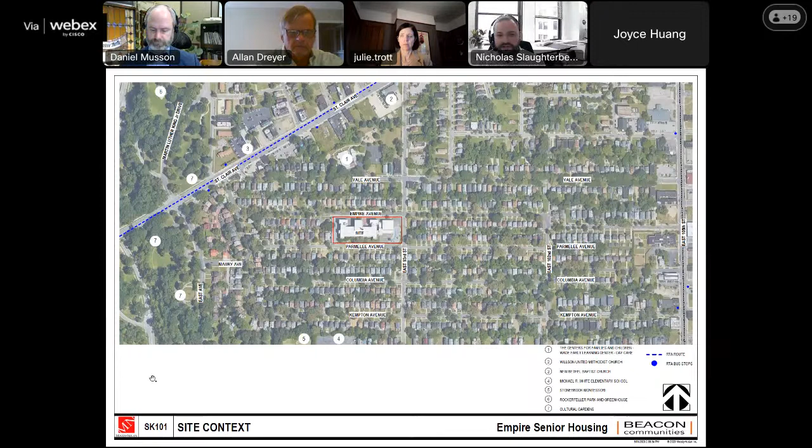It is located between Empire Avenue and Parmelee Avenue off of East 93rd Street, south of St. Clair Avenue. The St. Clair bus line and bus stops are noted on the visible plan currently being shown.

Our proposal for this project is to eliminate the 1950s gym addition completely and restore the old girls' entrance that has been hidden by that gym. The existing gymnasium does not match the architecture of the remainder of the school.

Here you can see the contextual imagery of the surrounding housing. North on Empire is residential, single-family residential, and same on the south on Parmelee. The school truly is a neighborhood school tucked in between several residences and residential streets.

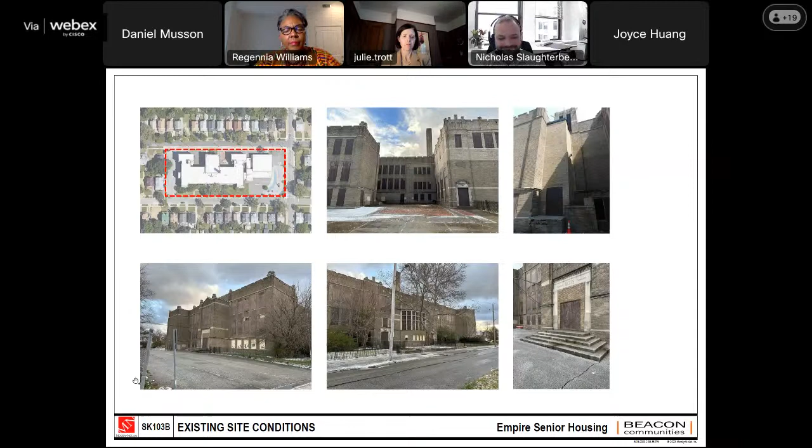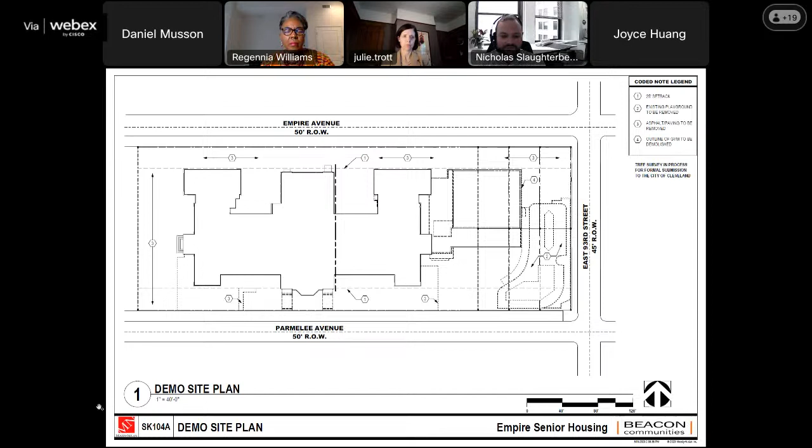The first floor of the building sits about 4 feet below grade. As such, we also need, as you can see, the northeastern courtyard has become a service courtyard. Currently, below that courtyard is a coal storage and boiler room, which will be infilled.

It is not in very good condition currently, so we are planning on adding a service ramp, a generator, and transformer in that courtyard.

As we move to the opposite end of the auditorium space, the northwestern courtyard will become a resident patio, which we'll see more information on in the next slide.

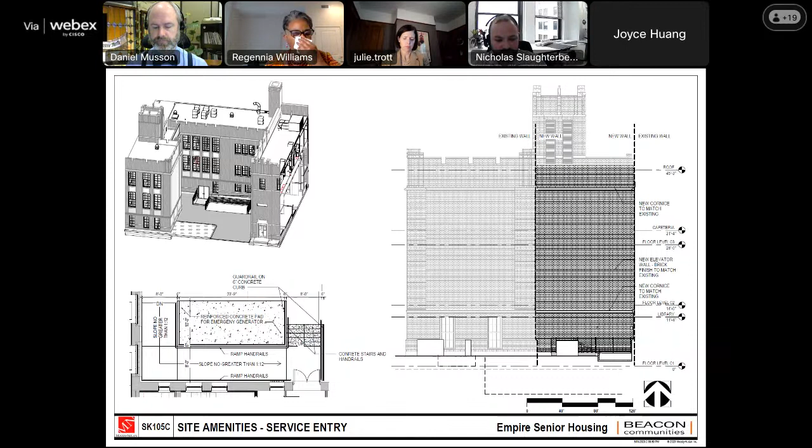Here we see the service courtyard highlighting the new wall that we are planning on building to match the existing as best as possible. We're trying to carry over the architectural features from that wall with this new one, and this is for the new elevator shafts. We're also planning on creating the service slope up for the trash pickup.

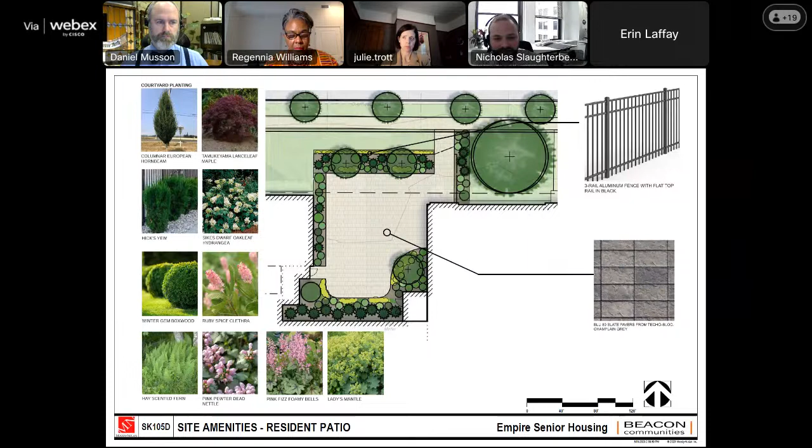Hello, this is Erin Laffay from Daru. The planting, we will have a strong evergreen planting around the perimeter of the site, and then low maintenance perennials and a couple trees. Everything is low maintenance. It doesn't need to be shaped regularly, and nothing that is invasive.

These are more of the trees that Erin was just talking about, and some more of the site planting.

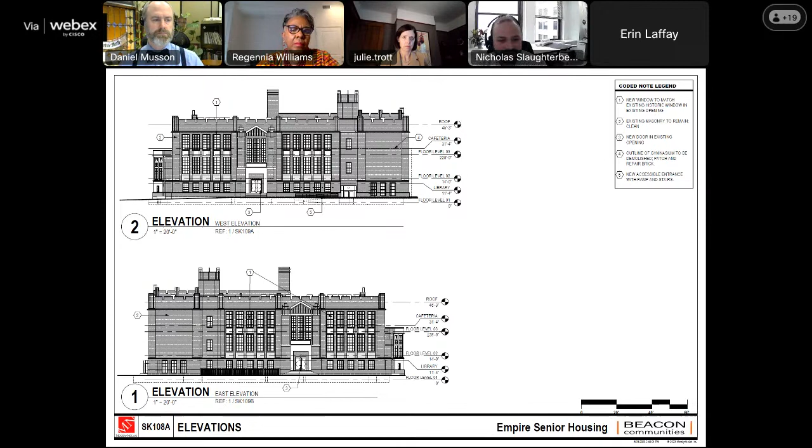These next couple slides are, again, just more imagery of what the proposal is, restoring these windows back to their original look as best as possible.

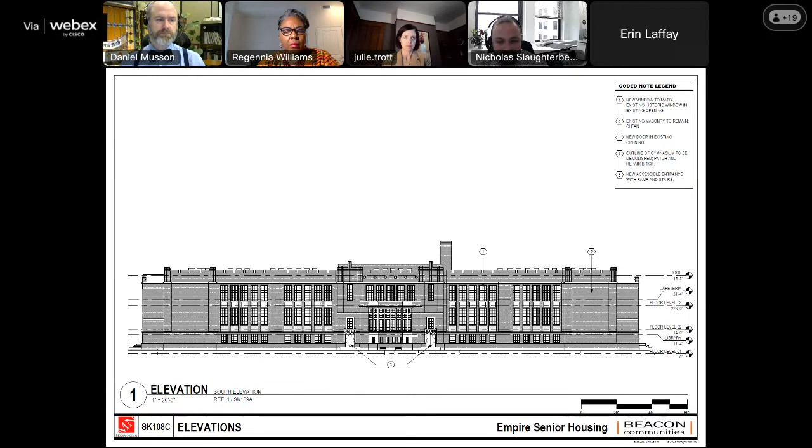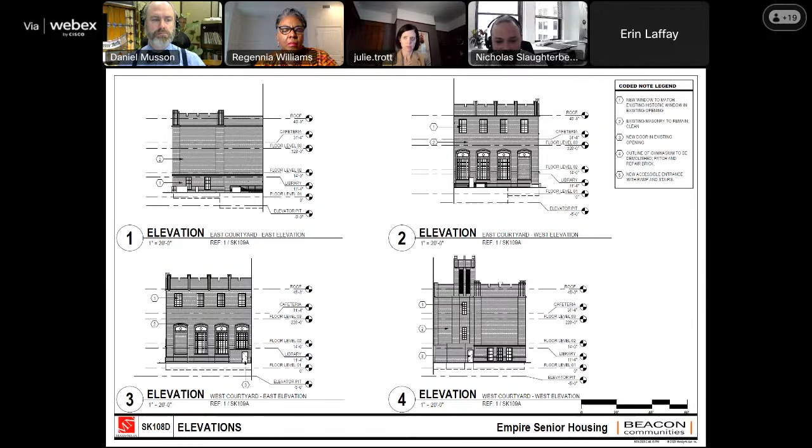When we move into the plans, the interior of the building has 65 units throughout. The first floor plays host to deliveries, the main office, as well as several one-bedroom units on the first floor, 16 to be exact. The main auditorium space is going to be retrofitted into a community fitness room, an area for light aerobic activity for the residents to maintain health and wellness.

The lower portion below is planned on being maintenance and the central plant and electric utility room. Next slide.

As we move up in the building, the original intent is to repurpose the library as units, and all of the classrooms are being refitted to be new single bedroom units. Next slide, please.

And finally, as we reach the third floor, the existing cafeteria space is going to be retrofitted additionally with about 5 or 6 different units, one of which being a studio unit. One of the challenges of this project, as we were trying to fit units into classrooms, was also making sure that we had the proper lighting and proper scale of the units.

Trash chutes will go down to the first floor and empty out through that service courtyard. The intention for all 3 floors was to keep the hallway, the east and west stairs, the boys and girls stairs, and the auditorium as areas of historic preservation.

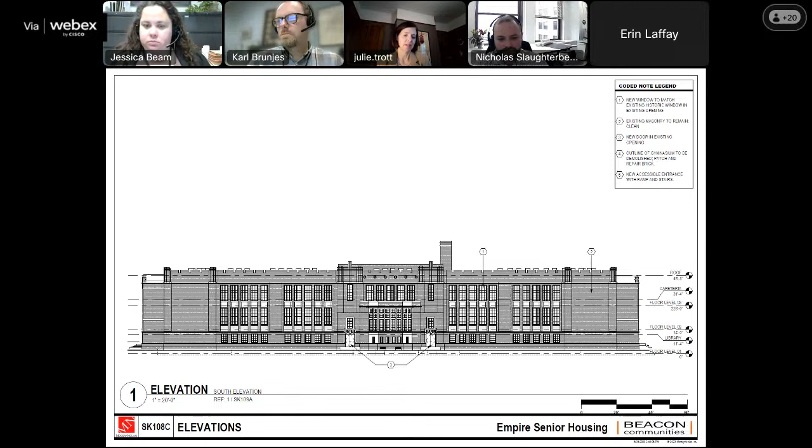I will begin. I think this is a very sensitive project. I do also support the demolition of the gym, and I feel the landscaping is aligned with the use of the building and does not take away from the building itself. So I am supportive of new landscaping and lighting also. Ms. Anderson?

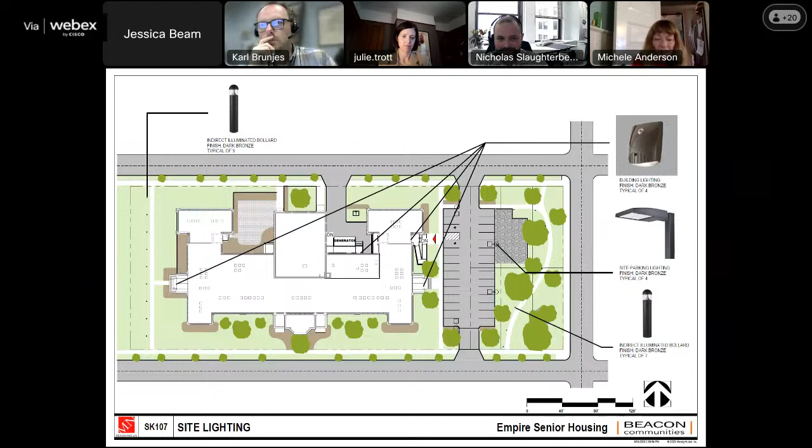Thank you, Madam Chair. Just a question about the windows. If we go to the exterior rendering, that color rendering, that one. In this drawing, it shows the windows on some of the first floor or second floor units have probably what were the original configuration, and then on the top floor there's a different configuration that looks a little more modern. I was just wondering if the windows are going to be consistent, or if they're going to maintain the windows as they are now. That's my question.

The intention of the window renovation is to replace all of the windows with new to match the existing—sorry, let me rephrase that, because existing could be either or. The original windows you're seeing, which have the muntins, the 9-panel windows, double hung, those will be the windows that we're trying our best to replace and emulate. Those 3-panel windows will be removed and replaced with the 9 panels.

Yeah, I think that would be preferable. I'm very supportive of this project. It's wonderful that this lovely building is being repurposed, and I'm very supportive also of removing the gym. This is something that's been a long time coming. So thank you.

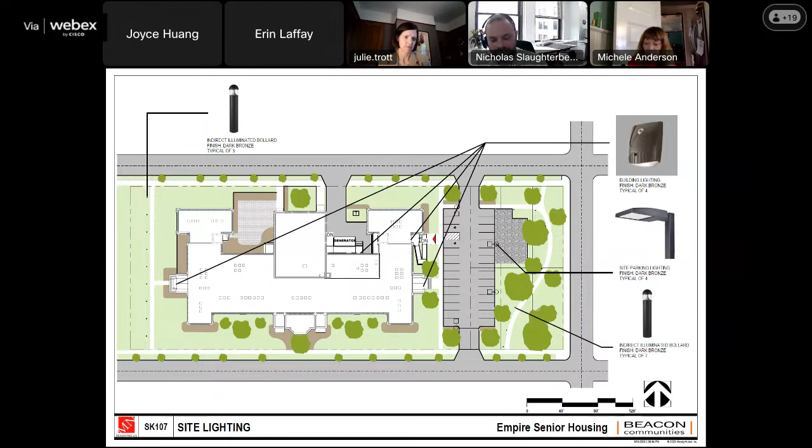Great, thank you. Madam Chair, I have another question, and can everyone hear me better now? Okay, excellent. My question is about the bike rack fixture. I see that you have a S-shaped bike rack selected, and I wanted to comment that I do think we want to make sure those bike racks are able to fit e-bikes, as more and more people are using different sized e-bikes, especially the larger ones. So I wanted to make a comment to select one that might work for all types of bike sizes. Thank you.

That is definitely something we will look into to confirm that they will work for all bikes. Overall, my last comment is I'm really happy to see this move forward. I want to commend our asset redevelopment strategists over in community development, as well as landmark staff who are continuing to help this project proceed. Thanks.

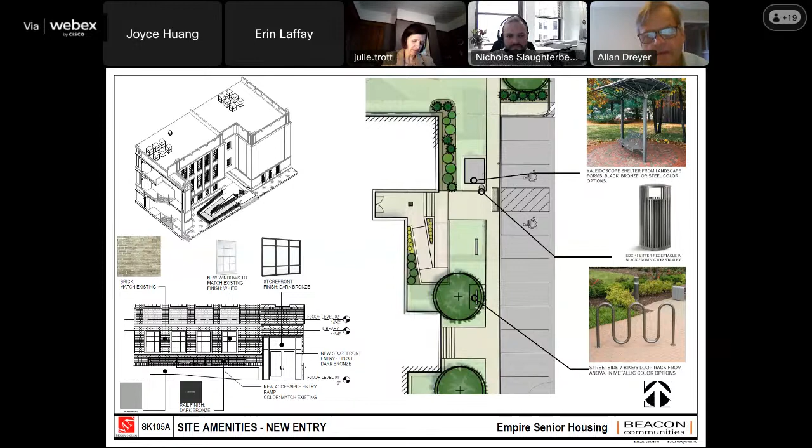Thank you, Director Huang. Mr. Dreyer? Yeah, this is obviously a great project, and I wish we had more of them coming down like this. I'm going to make the most minor comment that I could figure out how to make, but it sticks out to me. When you redo the girls' entrance, if you could make sure that the stairs match the stairs on the boys' entrance. The drawing has them looking different. The ones at the boys' entrance are very, very nice, and I don't know what you call them, but they're kind of like the, I don't know. But anyway, that's my comment.

Yeah, I think this is just a drawing error. The intent is for them both to match. All right, excellent. Thank you, Mr. Dreyer.

Ms. Williams? Madam Chair, I think this is a wonderful project. I want to start by saying that. Just had a quick comment, maybe question, because I heard our presenter say that the building had deteriorated significantly, and you've not been able to see all of the interior of the complex because of that deterioration. I guess I'm wondering, what if the deterioration is so great that it would prevent the forward movement of the plan that you've outlined today? Do you have any idea what kinds of challenges await you once you're able to see the entire interior of the school?

We plan on beginning remediation efforts here in the coming months. The current issue, there are some areas with wood flooring that are in rough shape. The floors appear to be concrete deck, and the roof, and structurally it seems rather sound in there. The big issue going in is not so much the structural soundness, it is the presence of asbestos, black mold. Just about every fungus under the sun is in there. Believe me when I say photos inside look like a horror movie. It is truly terrifying. So we're not anticipating any major structural issues so much as we are health hazards that we're planning on remediating.

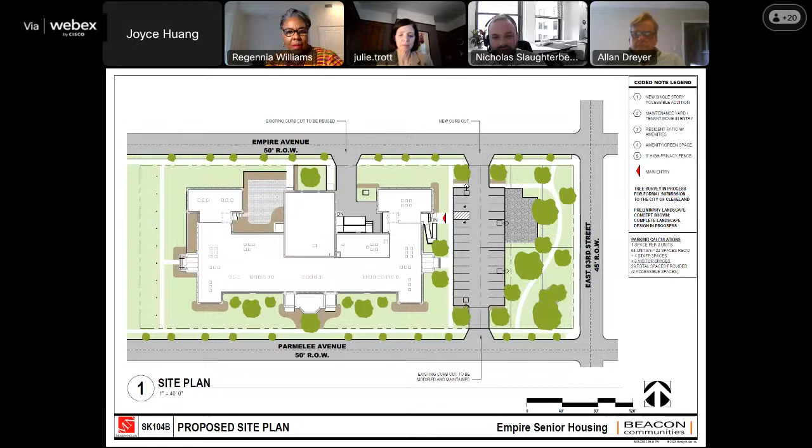Anything else, Ms. Williams? No, that's it. Thank you very much. Excellent.

Mr. Musson: Madam Chair, I just wanted to point out that this project will require two motions. Case 23-22 is for the demolition of the gymnasium, and case 23-23 is for the actual renovation and redevelopment of the property. So when someone makes a motion, we'll need two separate ones. Thank you for that reminder.

Not seeing any additional questions or comments, would someone like to make a motion on the demolition? Mr. Dreyer? Mr. Dreyer, if you're talking, I believe you might be muted. That's right, I am muted. I make the motion to approve the demolition of the gym.

Excellent. We have a motion on the table. Do we have a second? I'll second that. Thank you, Ms. Anderson. Any further discussion?

Not seeing any. Mr. Musson, please call roll. Ms. Anderson, Yes. Mr. Dreyer, Yes. Director Huang, Yes. Dr. Williams, Yes. and Ms. Trott, Yes. Madam Chair, the motion passes unanimously.

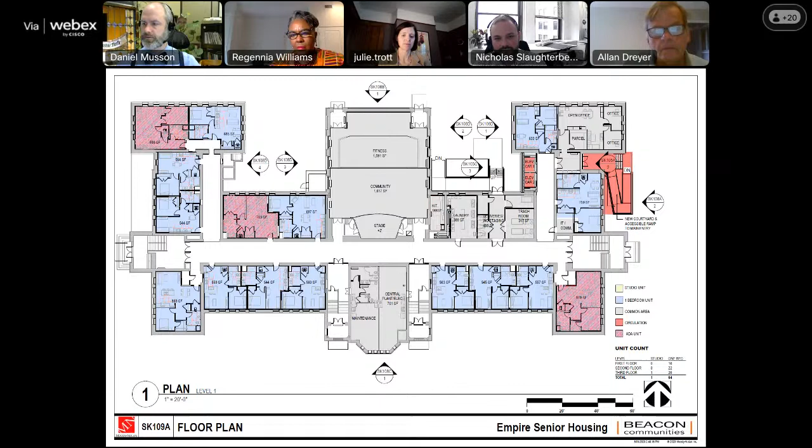Would you consider adding the two recommendations to confirm that the bike rack works with all sizes of bikes, inclusive of e-bikes, and confirming that the two stairs will match on both sides? Yes, I do. Yes. All right, thank you.

So we have a motion. Do we have a second? I will second, Director Huang. Thank you for the second, Director Huang.

Any further discussion? Mr. Dreyer? Do we want to, I may have missed this, but do we want to add a condition that they come back for the windows?

We could, or at least require them to go to staff. So submit the final window details to staff? Right. Ms. Anderson, Director Huang, are you good with that addition? Yes. All right, thank you, Mr. Dreyer. So we'll add that as a condition to submit the final window details to staff for review.

Any further discussion? All right, Mr. Musson, please call roll and announce the results. Ms. Anderson, Yes. Mr. Dreyer, Yes. Director Huang, Yes. Dr. Williams, Yes. and Ms. Trott, Yes. Madam Chair, the motion passes unanimously.

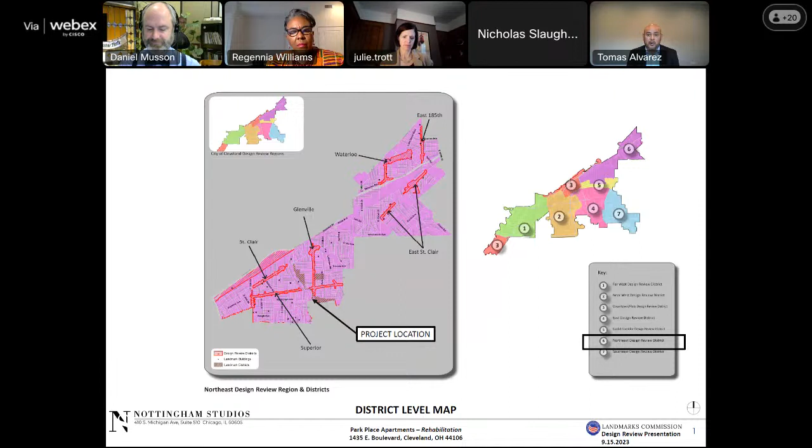Wonderful. This project, first of all, I would like to begin by giving a short description of the development team. The development team is located in California, it's the Transcend Group. They've done a lot of projects in the state of Ohio as the Transcend Group, and previously called Preservation Partners. So not only Nottingham Studios, the architect, but the Transcend Group are quite familiar with the requirements from QAP through local requirements.

But one of the things that we always like to make clear when we give presentations is that the Transcend Group's model revolves around purchasing distressed properties and improving primarily the interior of the units in order to improve the lifestyle of the tenants. So I bring this up because I wanted to make sure that the committee is aware that the focus of the design team and the development team is to improve the interiors primarily. That being said, I think we can jump into this. Can we please go to the next slide?

Park Place Apartments was built in 1965, designed by Robert P. Madison, a native of Cleveland. It's located at the intersection of Wade Park Avenue and East Boulevard. It is a total of 126 units, the design is brutalist architecture, and it revolves around building number 1. If you look at the center of this plan, this map, building number 1 is a serpentine design. It's this wavy, very, very interesting, and I'm sure quite difficult to build building.

Buildings 2, 3, and 4 are rather similar. 3 and 4 are 1 and 2 bedroom apartments. Building 2, all the way to the right, are 2 and 3 bedroom townhomes. Next slide, please.

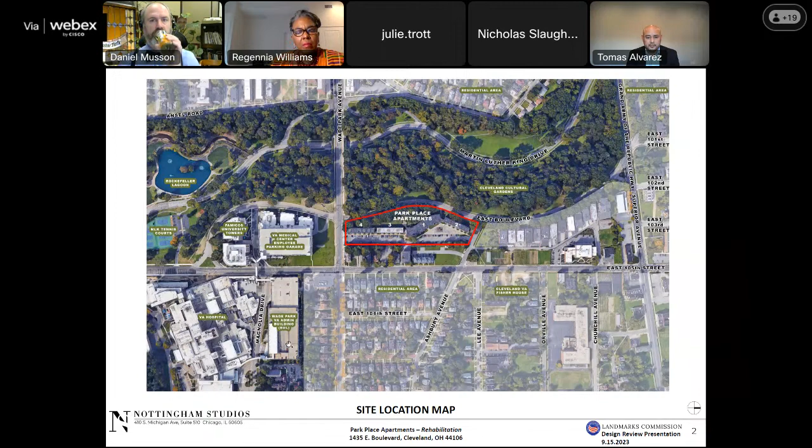That is one of the comments we have from the design committee. They suggested it would be beneficial for the overall improvement of the project to remove this fence, in order to jumpstart the use of that side. The cultural gardens are such a beautiful part that the tenants should, in theory, have access to. So that fence is really not doing much for security.

After speaking with the development team and sharing the concerns and suggestions from the design committee, it has been added to the scope of work to remove the fence and also to provide more seating areas and gathering areas on the west side of the project facing the gardens.

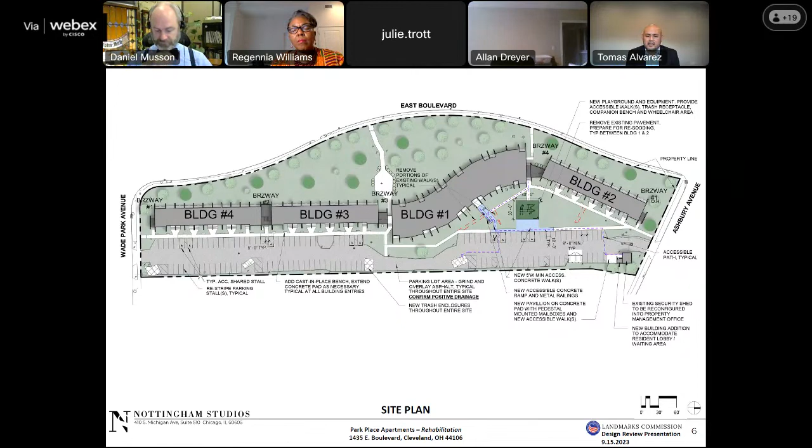Building number 1, the primary entry, is shown in the bottom left plan, an enlarged plan. The ramp will provide access to the main level, and from there, there will be an inclined lift for wheelchairs, allowing tenants to access any floor within the building. The units are distributed throughout, and we are enlarging the vestibule to comply with accessibility requirements.

All the doors will be on actuators. The management office, shown in the top right enlarged plan, is being relocated from the left plan's laundry room, which is where the management office currently is.

We want to provide easier access to all the tenants from all 4 buildings, so we are relocating the office to an existing security building on the north side of the site. We're also moving the mail room to an exterior, covered mail area, and the management office will be improved in all aspects.

The playground equipment will be new, along with the playground surface, sitting area, and bench, and access to it will be accessible. Next slide, please.

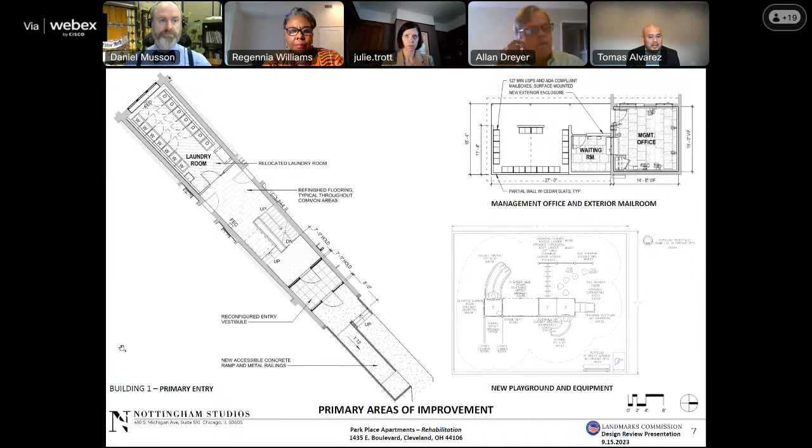There are a significant amount of existing trees that will all be protected during construction. In addition, supplemental shrubs and trees will be added.

This landscape plan is good to show because the east side, which is the top of your screen, is the area that the design committee suggested be activated for the tenant. So again, the fence along East Boulevard will be removed, providing access to the park and to the gardens, and new benches will be provided at that large sitting area where the existing shrubs note is pointing to.

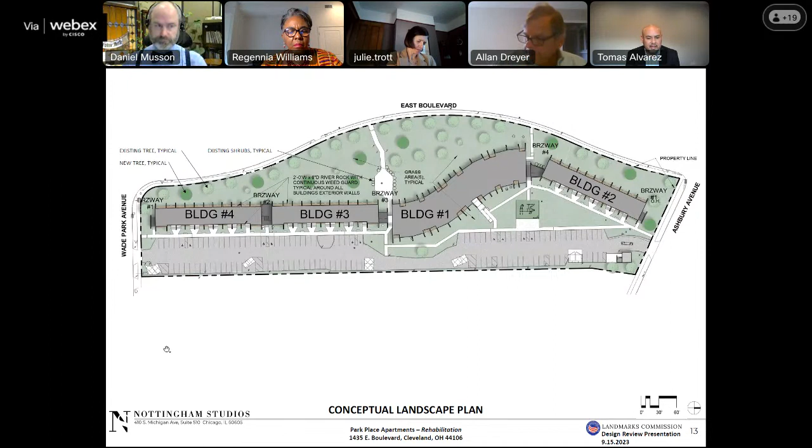Next slide, please. One of the primary focuses for this project was energy conservation.

And I know that this perhaps is not the right place to discuss it, but the plumbing fixtures for every unit are higher performance than WaterSense or any other typical requirements in affordable housing.

The plumbing fixtures will be high performance. All of the mechanical equipment has recently been replaced for high efficiency equipment. And the focus here is going to be the windows.

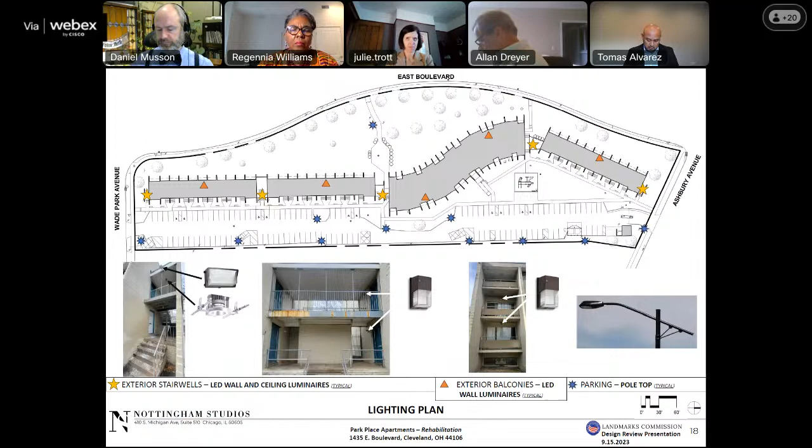I believe that is all that I have. If you don't mind, give me a second to check my notes and make sure I didn't miss anything important. I think I covered everything, but I wanted to reiterate that it's very important for our team and the development team to emphasize that our focus is on the interior of the units. Some of these units are not in living condition, and that is why the bulk of the budget is going to the units. So that is all I have.

I'm ready for questions. Excellent, thank you for the presentation.

Excellent, thank you for that summary. Landmark staff review comments? Thank you, Madam Chair. In reviewing the information submitted by the applicant, Landmark staff is generally supportive of this project, and we're happy to see some investment in these buildings. While they may be outside of the historic district's architectural period of significance, they are certainly significant, as Mr. Alvarez stated. The building was designed by Robert P. Madison, a prominent local architect who just turned 100 a few months ago.

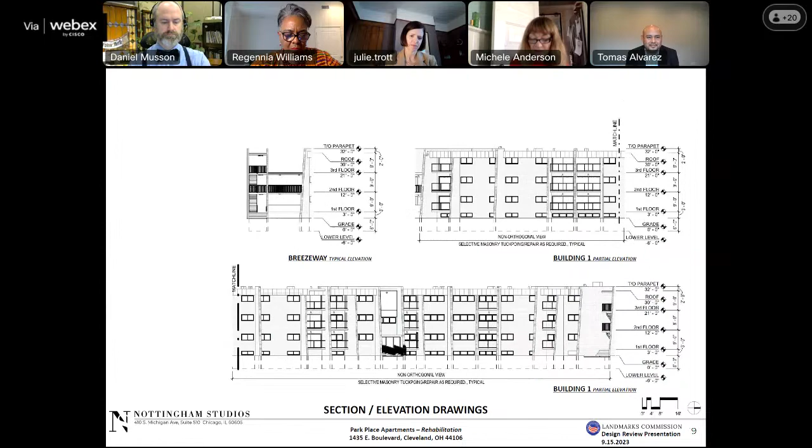Okay, Ms. Anderson, I believe you said you had 2 questions. Yes, that's my first question. The second question is regarding the fence—it appears to be a wrought iron fence that predates the building, maybe, it just looks like an older style fence. I was wondering if part of the reason it was there is so that it keeps the property from being like a pedestrian shortcut cut through. I was just wondering if that was analyzed as part of the ramifications of removing the fence. So yeah, those are my 2 questions.

Sure thing, I have to say they're both tough questions. Let me take a stab at this. Let's start with the windows. You are correct, 100% correct, and it is a fair concern when it comes to dark windows, whether it's dark bronze or dark vinyl or black vinyl windows. Vinyl windows did used to warp simply because the technology wasn't there. However, that is no longer an issue, and I can say that with certainty. These windows are insulated, the insulated glass panels, and the frame itself is thermally broken.

There's weeps, therefore the heat that enters the frame of the window is able to escape, so there's always airflow going through the frame of the window. That limits the amount of heat that's trapped and warps the window, so that is no longer a concern. I think I can confidently say that most designers would not specify dark windows if that was still the case. But one of the comments given to us earlier is that the committee would like to see some cut sheets for the windows, some product data. So we're more than happy to provide those.

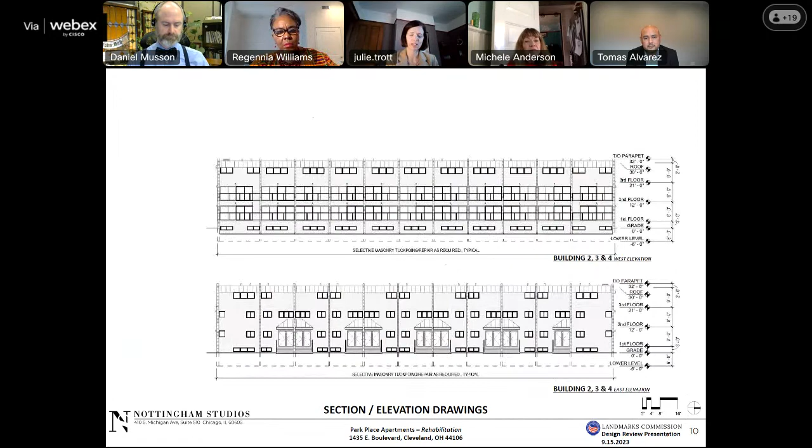Vinyl windows' life expectancy is 20 to 40 years, and of darker colors that is closer to 20 than 40. Have you explored a composite fiberglass window for here? We did, and we do have an allowance in the budget to upgrade the windows, so it does remain an option. My personal preference would go to fiberglass because of the durability and life expectancy. You're making a significant investment in this building, and we want it to be worth your while for a long period of time. So my recommendation would be to explore the fiberglass composite windows for the durability and life expectancy.

You had mentioned your renderings - Carl, do you mind going to the rendering that was part of the package? Right there. Is that the only rendering? I think it is. There is another slide with photographs, if that's what you're referring to.

No, this is good. In this rendering, it appears that your parapet fascia board and your railing panels appear to be in a black or gray color, but you had stated that they will match the existing color, which appears to match the lighter masonry color. Can you clarify which direction you're going? This rendering here is when we were doing a study for different colors for the metal, not only for the fascia but also for the balconies. So I believe, personally, I just want to be completely transparent that we should have added a different rendering instead of this one. But yeah, the colors are intended to match existing.

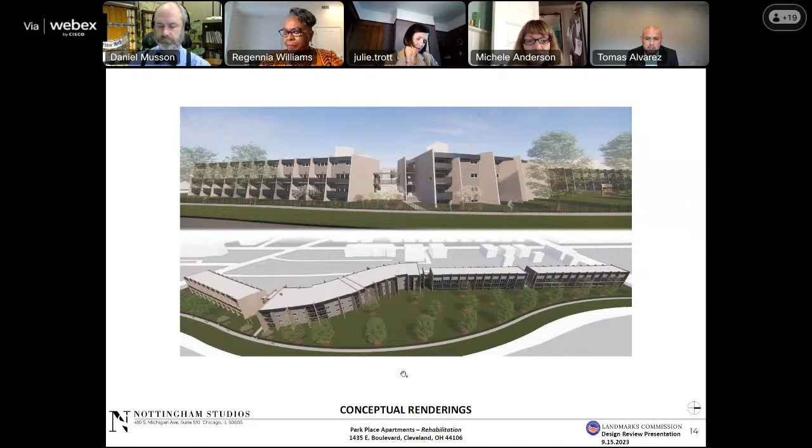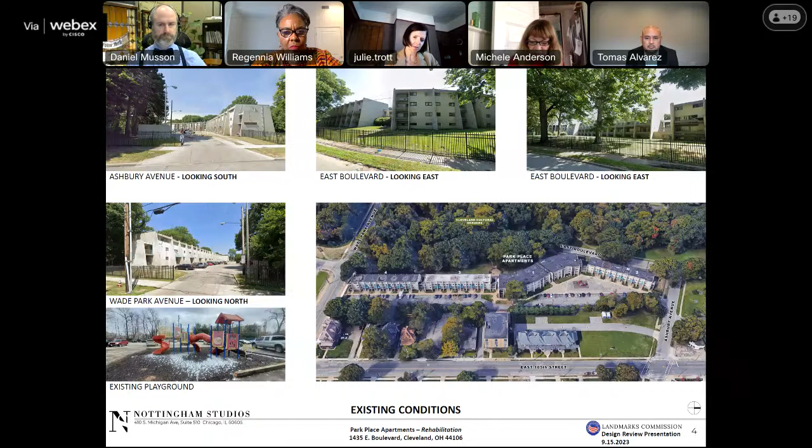Okay, so that will be for the overhang fascia panel and the railing panels. Correct. And then for the windows, you also stated in that rendering it appears that they were white windows, but you have stated they will match the existing black or dark bronze color. Correct. And the infill aluminum panel will be in the dark bronze color also? Yeah, it will match the window. It will be the infill insulated aluminum panel. The windows will come like that from the manufacturer, so it will match. Okay.

For anyone who makes a motion, I think we should just state that for the record so that we're all clear, since there is some discrepancy between the rendering that was submitted and what is being discussed, which I do support - everything that you have stated, matching the existing details as much as possible color-wise, and then finally exploring the composite fiberglass window, because I think that will really be a worthwhile investment.

I believe I actually have a meeting with the development team for a different project in just about 22 minutes, so I can discuss this, and I am certain that the development team can find a way to fund the upgraded windows. Excellent. Well, overall, I'm in support of the project. Any other questions or comments from the commission, or would someone like to put forward a motion?

This is Michele. I move that we approve as presented with the addition of making sure that the fascia panel and the balcony panels are the matching color, and that the applicant take serious consideration of using the fiberglass window instead of the vinyl. Would you consider adding the requirement that they submit the final door and window material cut sheets to staff for their review, along with the AC locations for staff review?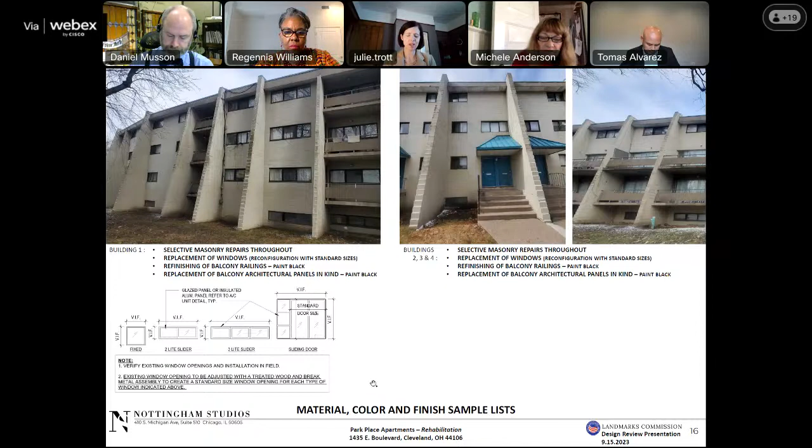Yes. All right, thank you, Ms. Anderson. We have a motion. Do we have a second? I'll second, this is Mike Sanbury. Thank you, Mr. Sanbury. Any further discussion?

All right, not seeing any. Mr. Musson, please call roll and announce the results.

Thank you, Ms. Anderson. Yes. Mr. Dryer. Yes. Councilwoman Gray. Maybe she's not here yet. Director Wong. Yes. Mr. Sandberry. Yes. Dr. Williams. Yes. And Ms. Trott. Yes.

Madam Chair, the motion passes unanimously. Congratulations, and we look forward to seeing your project move forward. Thank you all very much for your time. Thank you.

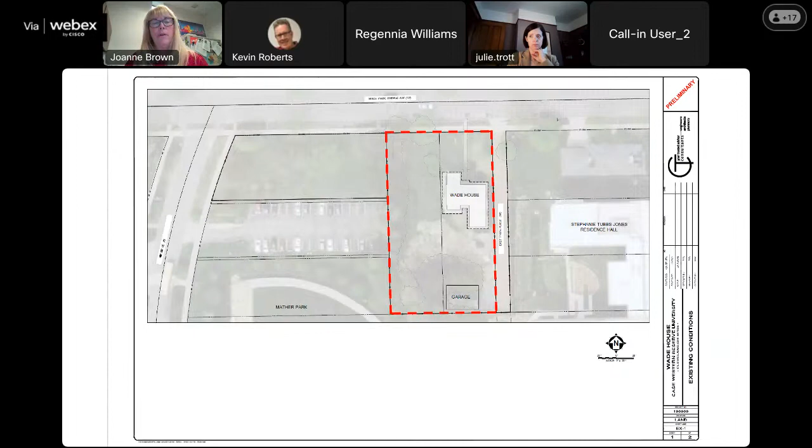This simply shows the parcels right now. The two parcels within the red are owned by the university, as well as the property directly across 114th Place street. On the left side, that corner parcel is owned by the university. Mather Park is there, and that parking lot is actually part of the music school.

Okay, I'm going to let Wendy Harbaugh talk a little more about the improvements for the site at this time.

Are you there, Wendy? You might be on mute. Sorry. Okay, I think we're still having a little issue. Wendy, are you on mute? I'm here. Okay, very good. Thank you.

For this review, we're looking for final approval. The prior review had, I believe, a site concept. We rearranged the parking lot to maintain more of the grass area and reduce the amount of pavement. The new parking lot configuration pulls off of the vacated East 114th Place brick road.

We've created a planting area between the parking lot and the back of the existing building. There's a swale there for drainage, adding an accessible sidewalk and access to a ramp and stair deck structure off the back that we'll go into further detail on, and then replacing all of the plantings directly at the perimeter of the building and cleaning up the rest of the property and plantings along the perimeter.

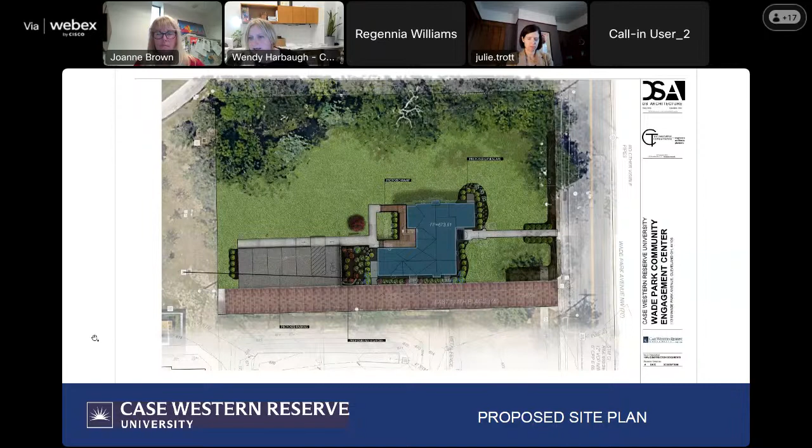Here is the line drawing with the revisions that we are making. In addition, we'll be restructuring the front step and stoop. That has failed, but the main approach to the house is still maintained, so it'll look the same from the front.

This is the extent of the addition for the accessible ramp. It's more of a deck style ramp with a mahogany colored PVC composite decking. This is fade resistant, so it will keep that deep color we like. The fence is a black metal picket, the guard and rail also a black picket, consistent with the existing fences along the property and the drive of our adjacent properties.

Landscaping plans: this is similar to what we had planted or presented for the conceptual review, utilizing boxwood and native flowering plants and hydrangeas consistent with a residential neighborhood and the other houses along Wade Park Avenue.

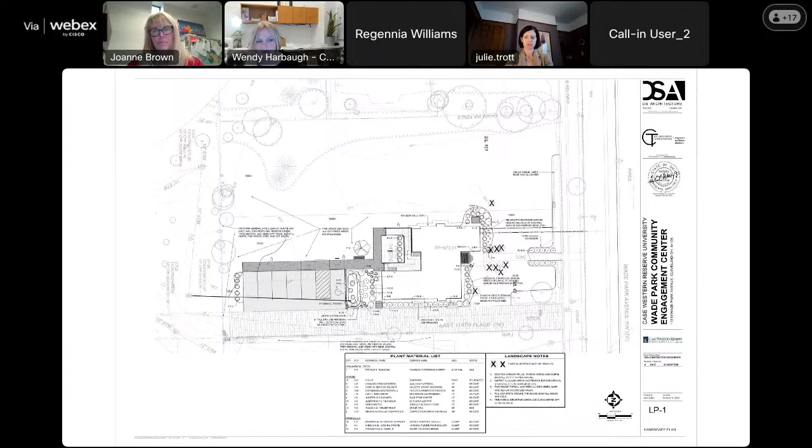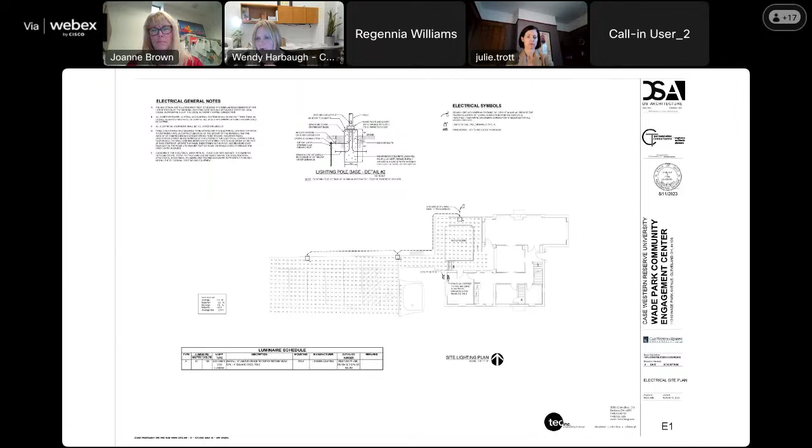We will be adding some site lighting in the back to light the back area of the house. It consists of two pole lamps. There's a cut sheet to follow this, but this drawing shows the light foot candles that they will cast in the back.

The site post lighting is shown on the top left. There will be 12-foot high square poles, black, with the fixture shown. In addition to the pole lights in the back, we will have some WSQ LED top fixtures in bronze color to better match the brick color, placed around the building. We can see those on an elevation further within the presentation.

The front porch originally had sconces. They're no longer there, but you can tell that they were there, so we will be installing a residential style sconce on each side of the front door.

Proposed exterior improvements - to reiterate what Joanne had said, we're removing the upper portion of the enclosure on the roof deck. That will be completely removed. The roof will be restored, we'll remove the door onto that upper roof, and shingle over that with shakes to match the existing, and paint all the shakes.

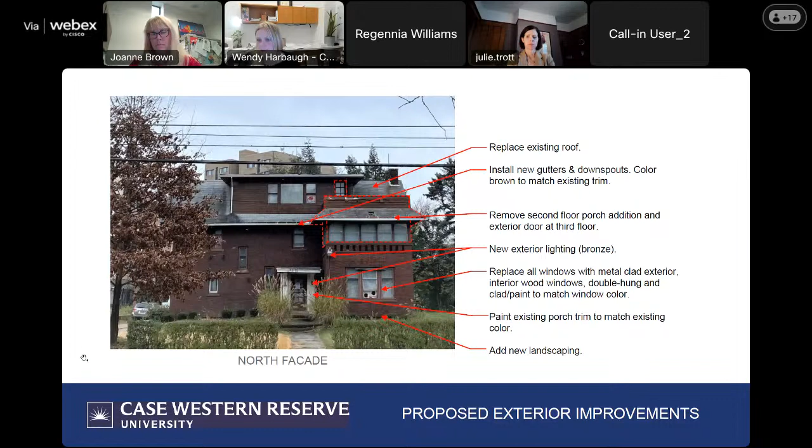The same work scope basically on the rear, and the dash box indicates where the new accessible ramp will be installed.

This is a change from the original presentation, but we have proposed to remove the existing porch or cover above that door, and we will also be removing both doors and replacing with windows, bricking it in to the size of the new window. After we programmed and finished planning the interior, it was determined that we do not need these doors, so we are eliminating them and replacing them with windows. We will also remove the stone staircase and install landscaping there. Both doors have a similar stair, so it'll be the same approach.

This is the west facade, more of the same. We'll be replacing all the windows, the roof, and constructing the rear ramp and access.

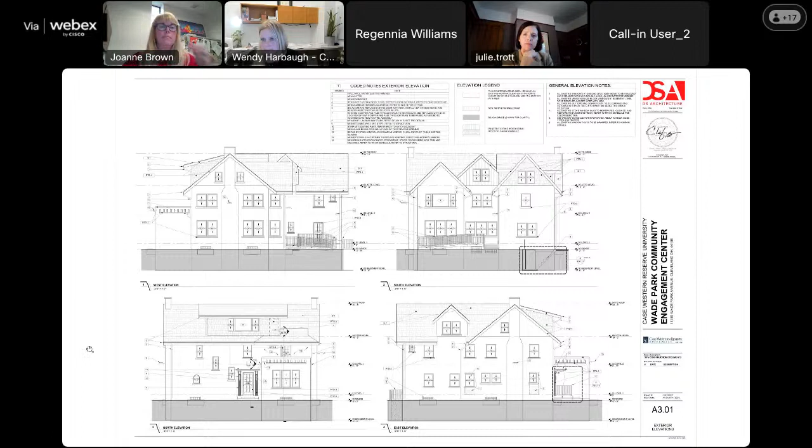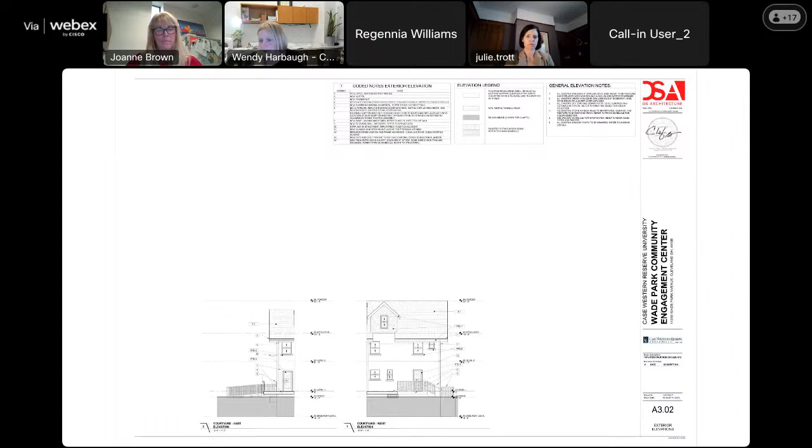Some more showing the hidden elevations at the turns. You can see that the new doors going in will be a residential style with a full light, similar to what we have at the front porch. And you can see the rail configuration.

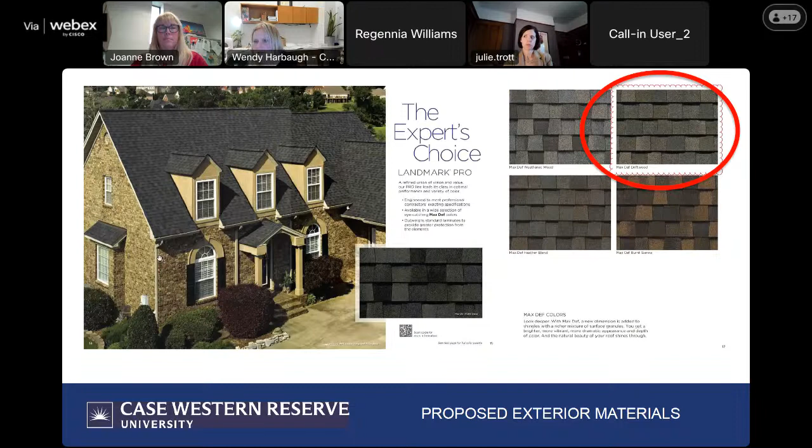And then here's the rendering with the adjusted window color. We are restoring the sills, that's our intent too, and we'll clean up all around the perimeter of the house.

And that's the final rendering of the front with the blue door. I don't think I mentioned, but we are restoring that half round leaded glass window - it's the only one, it's still completely intact, just needs to be restored and the lead canes replaced. We will also install a storm panel over top of it to protect it from future damage.

And then here's some interior renovations of the building. We do intend to keep it more of a residential feel inside with wood trim and wood doors, that more residential style, and crown molding.

I'd like to note one more thing. If we could go back two slides to the front—there you go. That upper porch that we removed, we are restoring that railing with the brick and the stone, but that is not a conducive height when we restore it to be able to utilize it as open space. That was one of the areas we were talking about, possibly creating a little outside porch. Because it does not meet code for railing heights, there will not be access onto that roof. We are just installing a window in the former door location right above there. I just wanted to clarify that. Thank you.

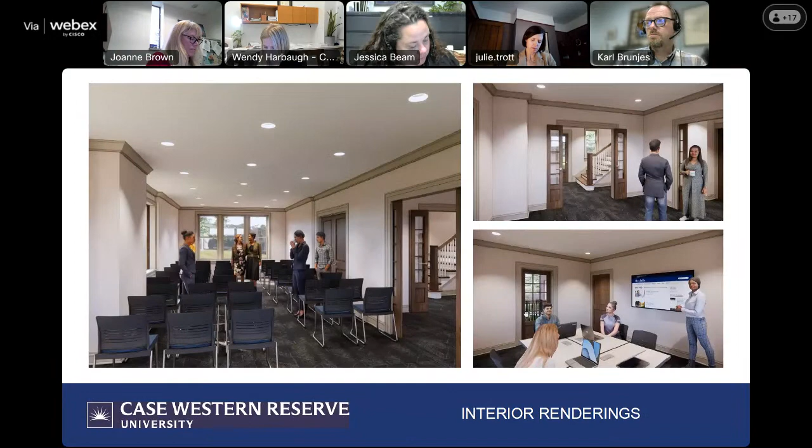Landmark staff recommendations and review. Thank you, Madam Chair. Landmarks is in agreement with the local committee. We feel that the windows should keep their existing configuration, so the cottage sash—using the cottage sash on the west facade to match the north facade for some continuity on the first floor. There are a couple other cottage sash windows on the front that they're changing as well, so we think this should all be cottage sash here on the first floor. The double hung windows in the areas where they already exist would be good.

Regarding the railing height and code, because you're in a historic district, I believe you're grandfathered in, so if there's that consideration for use of that area up there, you would not need to raise the level unless you're not feeling comfortable with the safety. Also, I believe there is a chain link fence on the west side of the property—I'm wondering if that's going to be removed as part of this, or is that a future phase? Otherwise, we feel this is a great outcome for this building to be used in this way.

Thank you. Yeah, we'll address some of those elements. The chain link fence would be a future phase, depending on whatever might happen with the Cornell parcel that the university owns.

Regarding the use of that porch area, from a safety standpoint, it is not the desire of the university to activate that space. We anticipate the trade-off is the more active space we have on the ground, and we have more of that now with the reconfiguration of the parking lot.

If we could go to the rear of the building—I don't think we have a rendering of it, but maybe one of the photographs. The thought was, actually, the next slide might be a little more beneficial. This is fine, but you can see the inset area in the center of the structure here, and on both the right and left side is where we have doors that enter in from the rear.

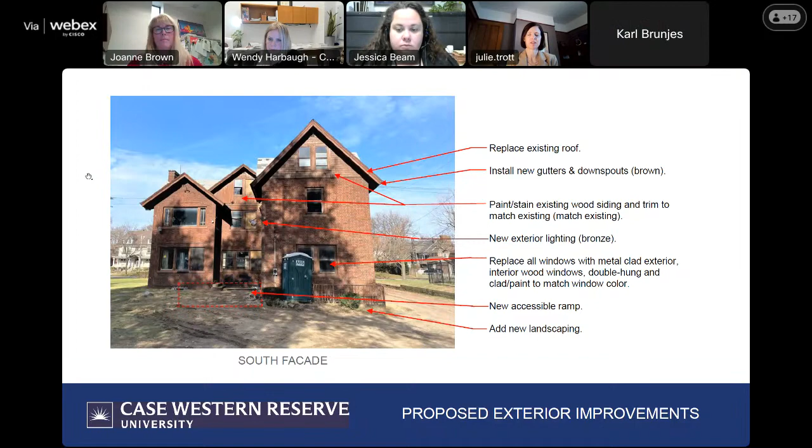Thank you for that clarification. We will open up the floor to the commission for questions and comments. Who would like to start us off?

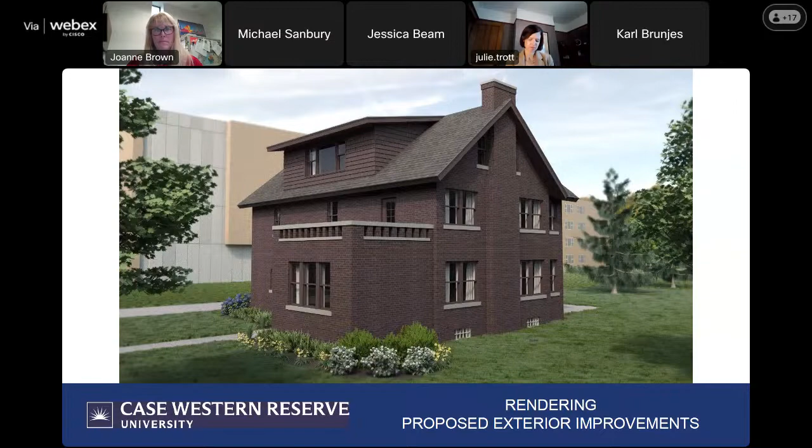Mr. Sanbury: First of all, I think the side doors, I'm okay with that, but I would like a little more clarification on how you're infilling those openings. Is the window going to be the same size as the other windows adjacent, or are you filling in the entire door depth? On the lower right-hand corner on that east elevation, you'll see the door closest to the new parking—the window in that door location would be the same width and the same depth as the adjacent windows.

And then that small area below it would be infilled with existing brick. We did salvage brick from the demo of the garage that matches the house. That front window is a little smaller due to the fact that it's a public restroom, just for visibility into the space. And that would also be infilled with salvaged brick.

Are you toothing the brick into the existing opening, or is there going to be a joint that shows where the original door opening was? This might get too detailed. At this time, I don't think we've gotten that far into it.

If there is a recommendation, we would certainly take that from the board. I would like to see evidence that a door existed there previously, whether that's to recess the brick about an inch or half an inch to give more of a shadow line, or if the easiest thing for you to do is to keep a mortar joint there with the outline of the door, something that still shows there was an opening there. You filled that in, but it's an appropriate change to the building.

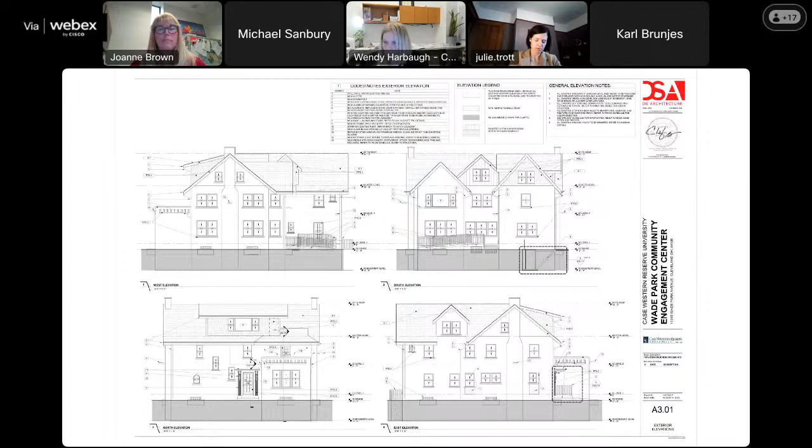We can do that. Additionally, I do have some issues with the windows. I think the design review board and the staff have already called those out. One of the things I do want to ask, in the detailed photo of the front stoop, Karl, if you can go to that.

That window looks like it's stained glass or something. Is that correct? It actually is a vinyl applied to the interior. Oh, those go up the stairs. Okay, so it's not an original feature. Correct. Got it. Okay, thank you.

Thank you, Mr. Sanbury. Other questions and comments from the commission? Ms. Anderson? Thank you, Madam Chair. I am so happy to see you moving forward with the renovation of this building. A few years ago, we had a site visit for consideration for demolition. So it's really nice to see that this building will be preserved and reused, and it looks like you're going to be making some wonderful improvements.

You know, I support the removal of that second floor area. I am in agreement with the recommendations from the local design review committee and Commissioner Sanbury's recommendations. Overall, I'm very supportive of this project. Thank you, Ms. Anderson. I would agree with all comments made. I have support, and I really want to commend the owner for maintaining your commitment to this building and restoring it. I think it's a wonderful building and will be a wonderful addition to your campus. I'm in support of the renovations being proposed.

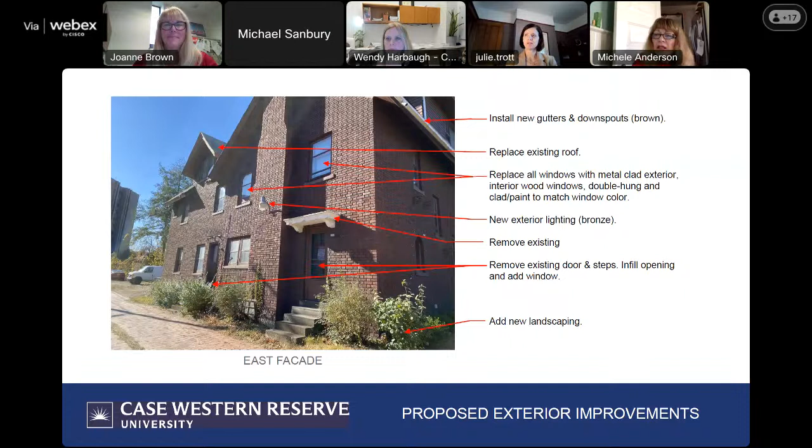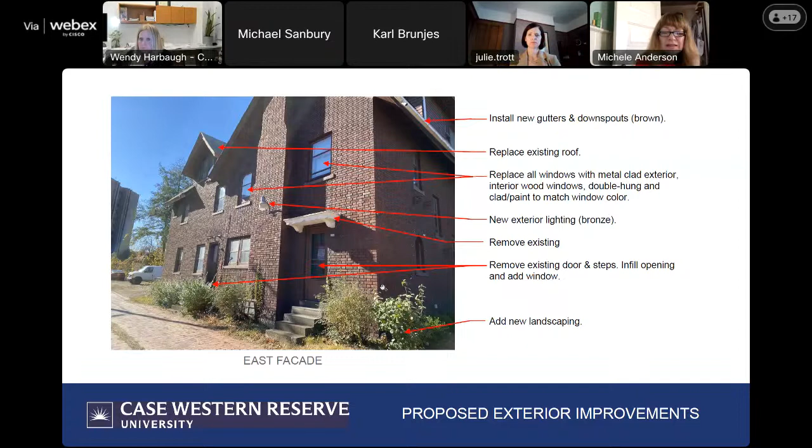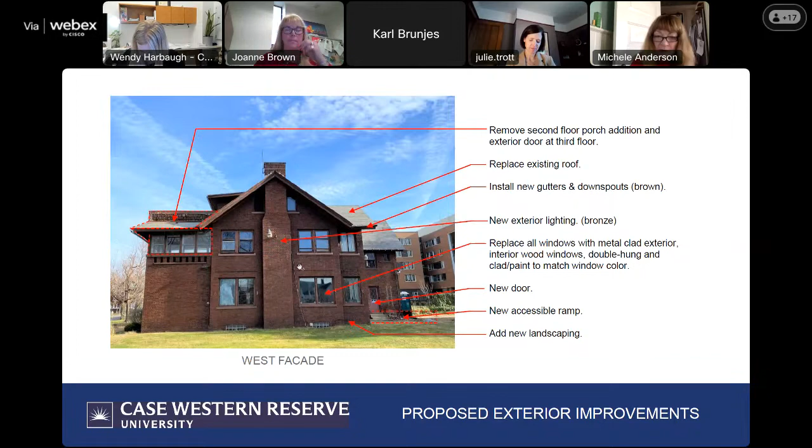Any other questions or comments from the commission, or would someone like to put forward a motion? Ms. Anderson, I saw your hand go up earlier. Oh, Michele, you are muted. I was having trouble with the raised hand, lower hand function. I suppose I can make a motion incorporating the recommendations from the design review committee regarding the windows, and looking into moving that canopy from the side to the back, as well as the changes for that side door towards the front, recessing the brick to indicate that there was at one time a door there. Did I get everything? You did, on my list, so great job.

So we have a motion. Do we have a second? I'll second, this is Mike Sanbury. Thank you, Mr. Sanbury. Any further discussion? Right, Mr. Musson, please call roll and announce the results.

Thank you. Ms. Anderson? Yes. Mr. Dreyer? Yes. Mr. Sanbury? Yes. Dr. Williams? Oh, I'm sorry, she's recusing. And Ms. Trott? Yes. Excuse me, this is Councilwoman Gray, I've been here, but I've been having some major technical difficulties, so I've been here for a little bit, but I just got in. Okay, so you're a call-in user too, I guess we'll take your vote. You vote yes? Yes. Okay. Madam Chair, the motion passes unanimously.

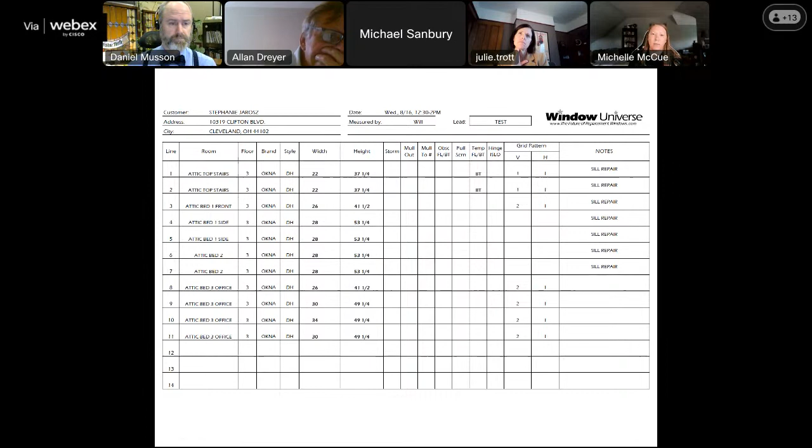We got a quote from Pella - around $22,000 for the vinyl, at about $500 per window for the wood composite. Ultimately, we went with Window Universe. Our original quote was $9,878 for white vinyl. We've changed to almond, which brings the price to $10,494. To get wood composite would change that price to $14,250, approximately a 44% price increase.

If you want to go through these slides, this is their actual brochure, and it shows you what the windows will look like. The one shown here is just showing the wood composite - the windows are exactly the same whether it's wood composite or vinyl. We've just chosen to go with vinyl for the top. I'm not going to walk through the brochure all the way, but you can see what the windows will look like, what their product is, how the windows are made, where the grids show, things like that.

And that is all I have.

I'm sure you're muted. Sure, yeah. Sorry. Thank you for the presentation, we appreciate it. You're welcome.

Thank you. We will move on next to Design Review Committee recommendations.

Thank you, Madam Chair. This project was reviewed by the Historic West Cleveland Design Review Committee on September 20th. There was no quorum, but the committee members present discussed the window color should match the existing windows, which was a tan color. They questioned if the aluminum coil around the windows would impact the decorative trim around the top of the house, and discussed composite or alternative window materials being preferred for the primary facades, which, since it's a corner house, would be the front and side.

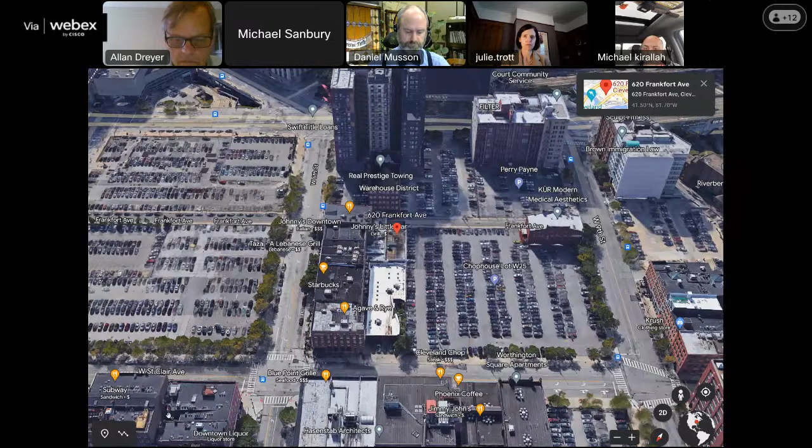Hello, this is Michael Kirallah. I'm the contractor for MEK Construction at 620 Frankfort Avenue. We are proposing to reface the building with signs and some paint. We already went into review with the Landmark Commission a couple months ago and they approved everything, they just needed to see better drawings and renderings. That's the side view of the building on the old front.

Michael, go ahead and run through everything on the project here. So we opened up the vestibule - there used to be three old garage doors there, and the center one we reopened to put a vestibule in. We proposed to put a new sign on top above the doors, and some metal artwork on the two sides of the new entrance, which is on a slide coming up.

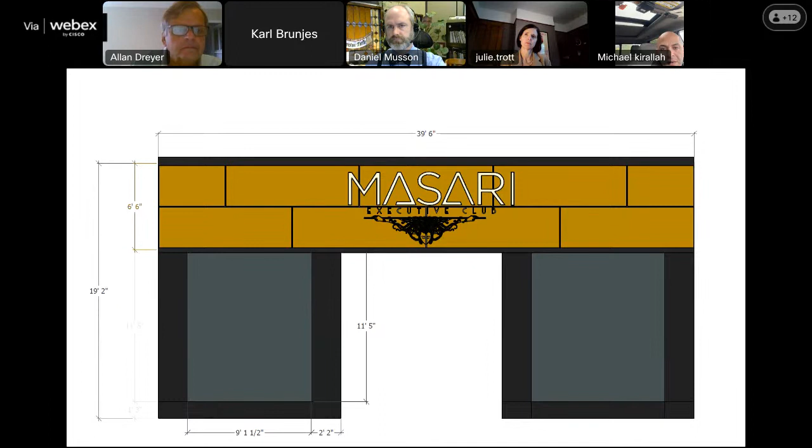Madam Chair, you're muted. Madam Chair, you're muted.

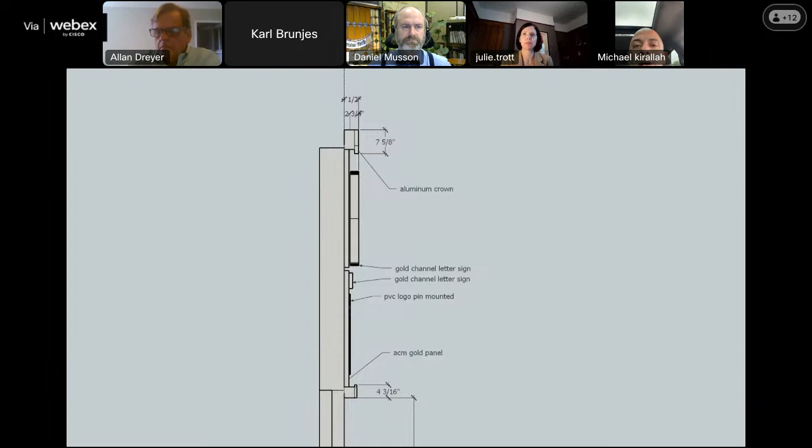Thank you, does that conclude your presentation? I'm kind of confused, I think I just needed to show you guys that one drawing of how everything is getting mounted to the building. Well, this is our first time reviewing it, so we want to see everything. The committee hasn't had a chance, the commission hasn't seen all the details. I believe you may have talked to the committee previously, so that's why we're going through it all. This has been helpful, and now we're going to move on and hear the committee's recommendations, and we'll ask you some additional questions in about 2 minutes.

I think we have the wrong slide up here. Hold on, we have a bit of a technical difficulty here. That's the comment for the next one.

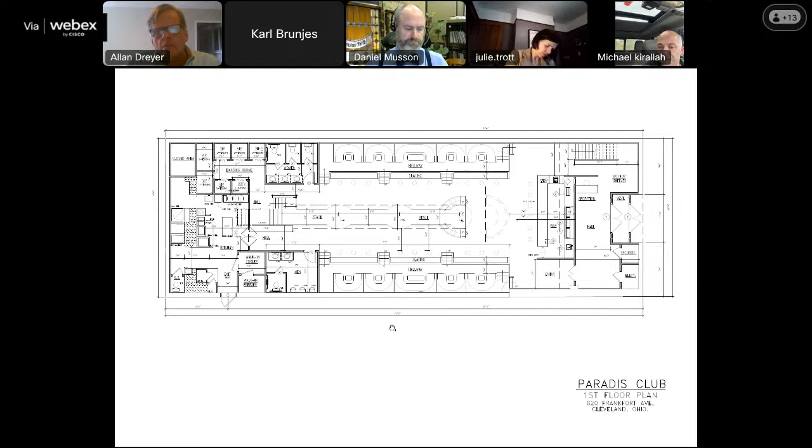I would just say when you submit your drawings for your permits, make sure everything's accurate, because that will come back. Correct, I have new drawings that are out, I just haven't been able to get them to you. And we are working with someone in the city, I think, for the mural on the side of the building. The owners of the building are speaking to someone in the mural department, I can't think of who the person is.

Tara probably is who you've been speaking to at the city. What was the name again? It kind of broke up. Am I muted? No, Tara is her first name that you've probably been speaking to at the city related to

The mural - I think this statement is once you decide if you are moving forward with the mural, you'll have to return for final approval along with your signage itself. Unless you are also asking for approval of the signage at this time, but if you are, we would require more detail on that signage. So I would recommend returning for your signage and the mural at a future date. Okay.

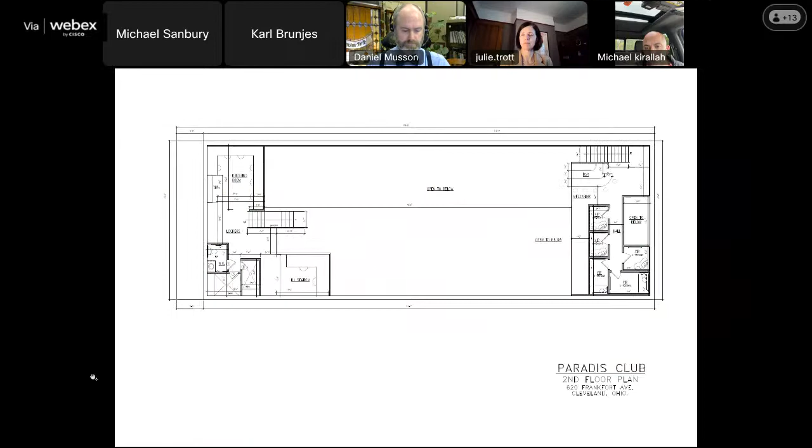Are you intending to paint the full facade first and then apply the panels, or are you only painting the parts that are exposed? No, the full facade first, then installing the panels.

Personally, I'd probably recommend against painting the entire facade, and just the portions that are exposed, just so that there is some breathability in the building. I would also recommend a paint that is approved for this kind of application, to allow the brick and the mortar to breathe and let water and air vapors pass through that barrier. It'll help the brick with its longevity.

The other question I have is about the front doors. The doors look like they're solid metal panel doors with details. The side lights - is that going to be glass? Is that a frosted glass or a clear glass? There won't be any side lights in the door. It should just be one solid panel for security. I'm reading that as a side light. Never mind.

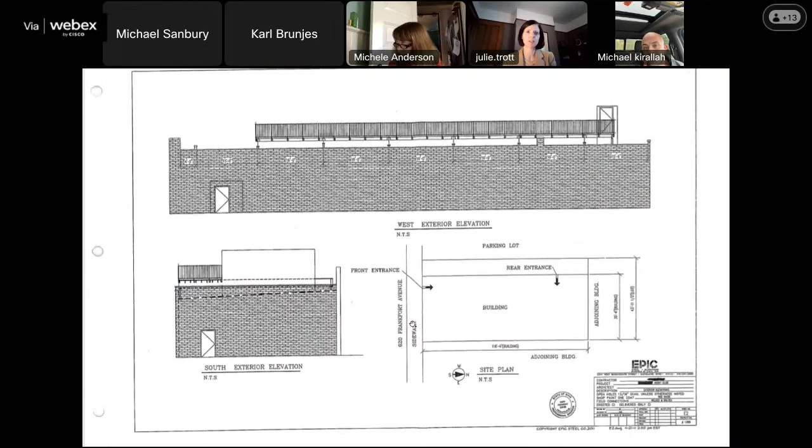Thank you, Ms. Anderson. I will move on to my questions, and sorry to harp on painting the brick - are you painting just the front elevation, or are you painting the side elevation and rear elevation that are currently white also? So will the entire building be painted, or just this front area, and the sides will remain white?

Well, the sides, we were going to wait to see. I mean, eventually we're going to paint the sides a neutral color if we're not able to put a mural on the entire side of that building. But yes, we will be painting a neutral color if we don't decide to get a mural on the side of the building - it's not approved. Okay, because there are some graffiti tags on that building from the previous owners that need to be addressed.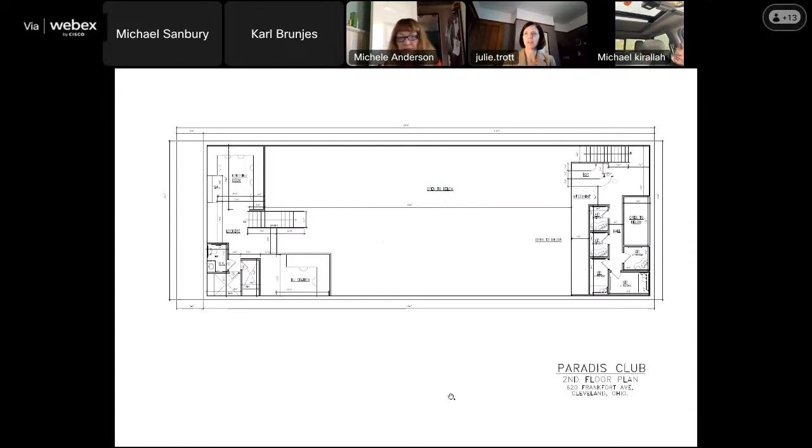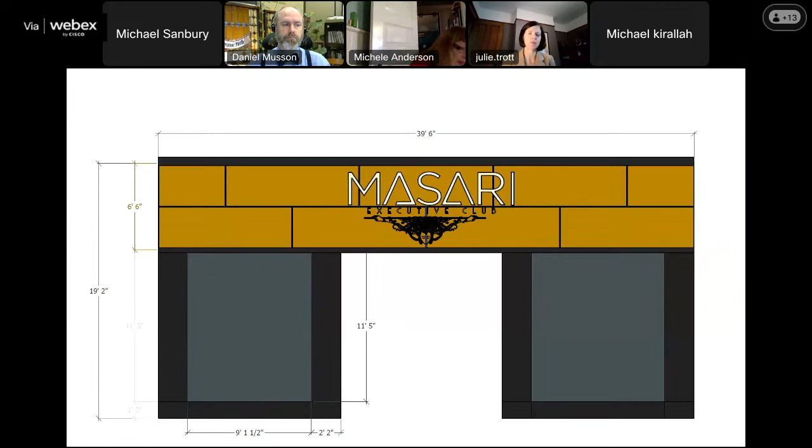I think at this point, I would submit that paint color with the proposal for the mural and signage, because that we will need for our records. So I'll submit that with the signage paint color. We will need - I think at this time we're only commenting on or reviewing the front elevation that's being proposed, is that correct, Mr. Musson? Yes, that's correct. Okay, so if you do paint the sides, or want to paint the sides, we'd ask you to return and talk to staff about the color that you select for both the side and the rear, along with your signage and any mural.

I would agree with the staff's comments that although this building does have some great little details, any installations of your panels should be within the mortar joints and not into the face brick itself.

The metal panel facade here, or the front signage panel, I would agree with staff. I think it would be nice if you could wrap the corner so it doesn't feel like just a facade itself, so it integrates the full building. I'd recommend wrapping that back maybe 12 inches so you have that engagement on the side.

We had intentions to do that. Sorry to cut you off, but I think the architect didn't include those in the drawings submitted to you. Okay, so if you could submit to staff the final details of that signage panel also.

I would also recommend, or agree with the recommendation, that you paint only the parts of the brick on this front face that are exposed so that it does have that breathability.

Finally, the decorative panels in the lower area, is that a segmented panel or what material is that? Is it a metal panel? Yeah, it's an aluminum segmented panel that just kind of pieces back together. There's a track that holds everything up, and then it all clips into place.

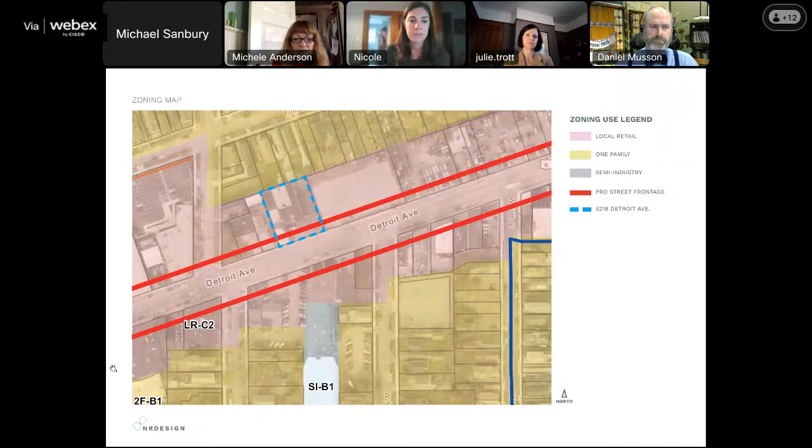We are proposing to do some changes to the site. Currently the parking lot is not striped, and I think it's just more a wear and tear issue, so we are proposing to stripe our parking against our building. We will have curbs to protect the building from cars, showing where our dumpster enclosure will be, and then trying to activate the front of our building to get more walking patrons.

This area has gone through a lot of changes recently. There's a lot of new homes, a lot more people living in this area and walking to and from. So we are proposing to put an outdoor deck space on the front of it, as well as bicycle parking, and really activating that street presence.

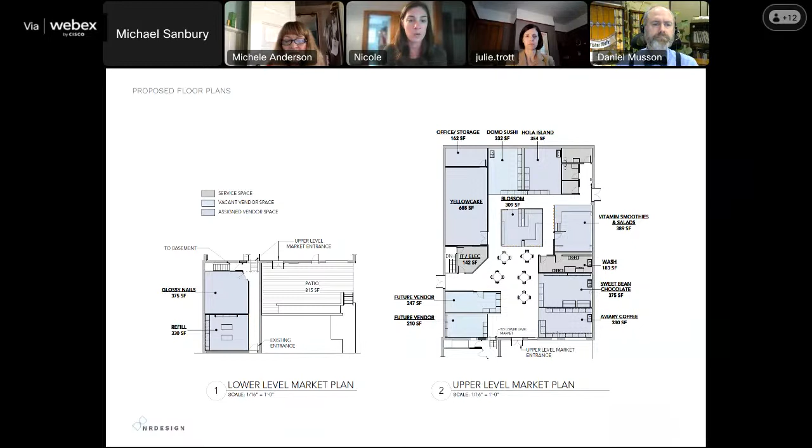The interior of the building will house several tenants. We have 2 spaces that are unspoken for at this moment. We will have 3 kitchens, a coffee shop, a chocolatier, a high fashion sales floor, flowers, and then a nail salon and a refill store for soaps and whatnot. This is the layout that we're working with.

The name of the market is El Corazon, so that will be the main signage on the front facade. We are planning on doing more of a directory signage on this side wall, as well as looking at potentially putting a mural on that side wall as well. That's it.

Thank you for the presentation. We'll move on then to Design Review Committee recommendations.

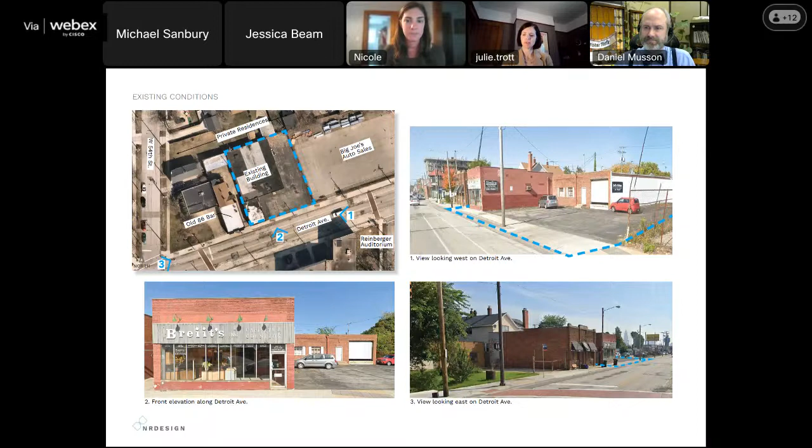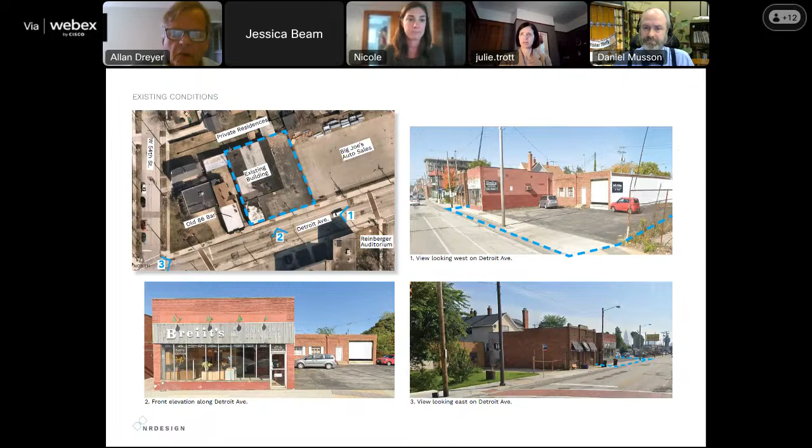Mr. Dreyer: I just want to clarify, so the blue's already been painted on the building, or just the front of the building? It has already been painted on the majority of the building. Okay, and so there is a tenant in there, so do you need a certificate of occupancy? Do you have that? We do have a certificate of occupancy currently. Okay, all right, thank you.

Thank you, Mr. Dreyer. Other questions and comments from the commission? Ms. Anderson? Thank you, Madam Chair.

I'm happy to see that it's not being painted black or gray, but I'm in agreement that the blue is not really fitting. Part of the brick has not been painted, and I kind of hate to paint brick without really some careful consideration of what's going on there. So those are my initial comments, and I'm inclined to agree with staff. I think that there's probably a lot of questions here that aren't answered yet. So it may be best to table this at this point, but those are just my initial comments. Thank you.

Thank you, Ms. Anderson. I do see we have someone from Northwest Neighborhoods, Ms. Kovar. Hi everybody, Chelsey Kovar, Director of Economic Development for Northwest Neighborhoods. I am also the Director of the Gordon Square Arts District Special Improvement District.

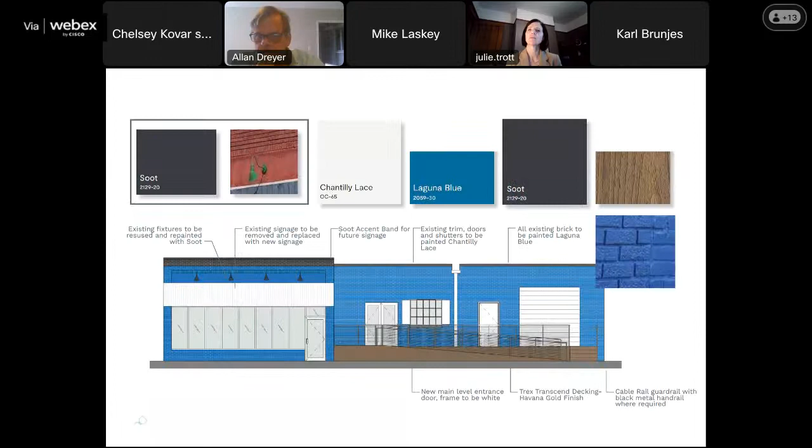Ms. Kovar, I'm sorry, I see your hand up. I know that this isn't zoning, but also with the plans they've shown to take up the parking lot and add an additional building, we're going to have issues with going through zoning that need to be addressed too. So those are things that, before you come back and present again, whether this is tabled or a denial, you're going to need to make sure all of those are remedied and looked at as well, because that's going to be another hitch, I believe.

What do you mean, another building? I'm not following - it says future marketplace, like you're bringing out some more building? No, that's the existing building. Okay, but you are eliminating some parking? No, it's remaining the same. Okay, it looked like you were eliminating some parking, and for that I would be concerned about the zoning ordinances. We took out a loading dock, but not parking.

With overviewing, like reviewing your whole entire site plan for the presentation, I would get guidance and make sure that this is in compliance as well, so this doesn't get kicked back for this. That was the only other suggestion that I had.

Okay, Ms. Williams, I see your hand up.

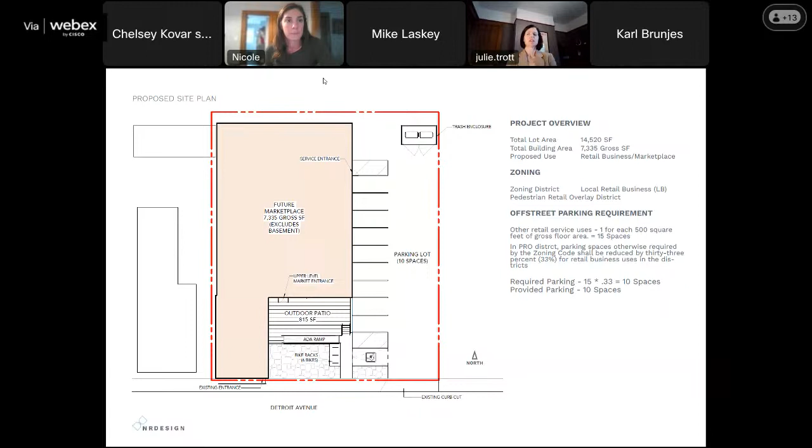Yeah, just wanted to echo some of the comments that were made earlier, because it seems to me that several of the parties involved have not communicated their intentions clearly to other parties, especially in the surrounding community. So I think it would be helpful if there could be offline discussions. And then, as you said, every two or four weeks from now, perhaps we could review this again. But at this point in time, I think it might be wise to reject the proposal as submitted.

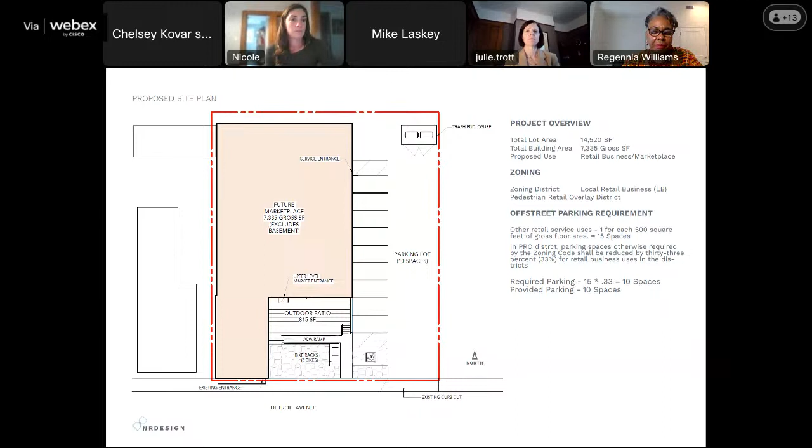Is that a motion? That was just a comment, echoing earlier comments, because we've been discussing this for a while. But I think there are offline discussions that need to take place before it could come back before the commission. So the difference between a denial and a tabling is this: if you're disapproved at this time, a motion of disapproval means you'll have to make changes to the proposal before you can reappear.

Correct, Mr. Musson and Mr. Brunjes? And how would that answer Nicole's question about whether it affects their zoning review at all, and the B number that's already been issued related to the application?

I'm looking at a cell right now. I don't see anything under this permanent parcel number or address in Accela. So I don't know that they have any pending paperwork, but typically if a permit application is made and then we make a denial, we would cancel that permit application, and they'd reapply. Since I'm not seeing one, I think they could just reapply through us again with new or changed information.

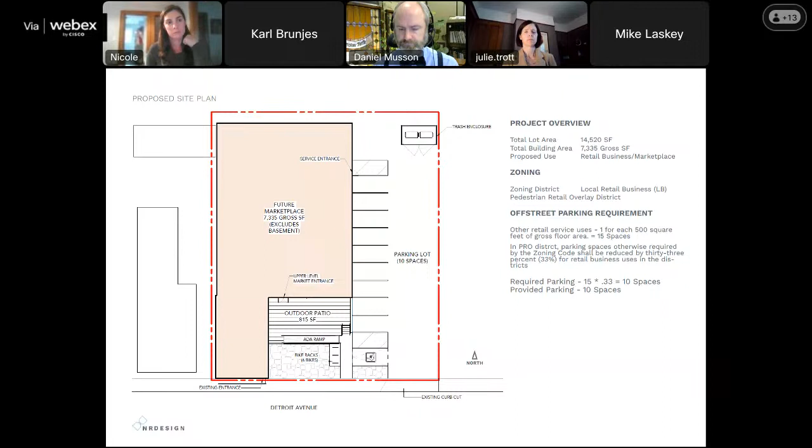You can apply for interior permits separately from exterior. So if you want to start moving forward with some of your improvements while you are going through our review process, this way you're not fully held up in doing everything, I would recommend that you consider that. Okay. Thank you.

Ms. Williams, I do see your hand up. Was it still up from previously, or did you have additional comments? So I'll take the hand down. Thank you. Okay.

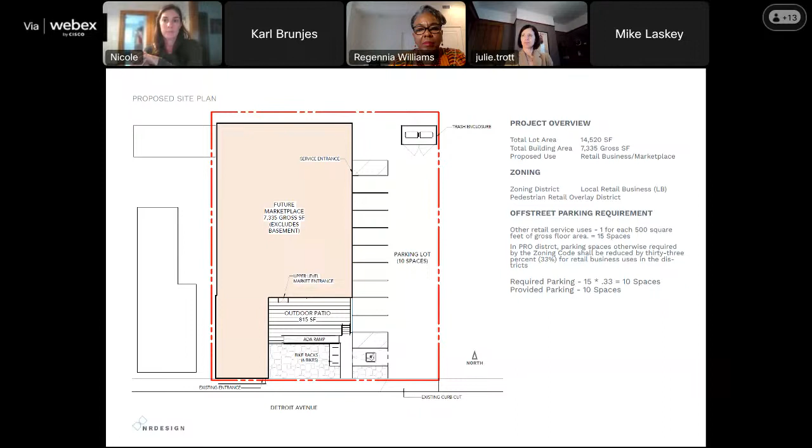Mr. Sanbury. Madam Chair, I was not aware that Mr. Laskey is an owner of this project, and I don't know the ownership or entities associated with this project, but I do have an active project with one of Mr. Laskey's companies. I may need to recuse myself. I'm not sure.

Okay, well then, do we still have... Is Mr. Laskey, are you part of the building ownership? Can we confirm that? Not yet, but I will be.

And I think if Mr. Sanbury and I know Michael from other projects, you should consider that I am part of the project, and this might be seen as a conflict. Thank you, Mike, I will recuse myself then. Okay, thank you, Mr. Sanbury, for making us aware of that.

All right, so I think we're at the point that I'd ask someone to put a motion forward so that we can continue moving this project forward. Mr. Dryer: I will move to deny the certificate of appropriateness.

We have a motion on the table. Do we have a second? Madam Chair, I second that motion. We have a motion and a second. Any further discussion?

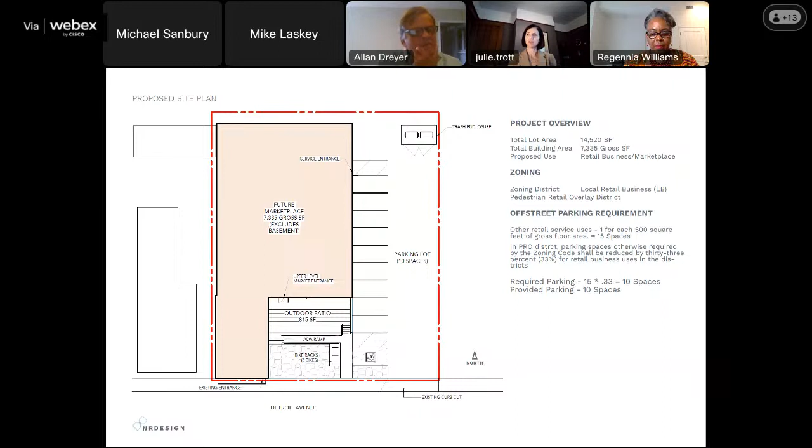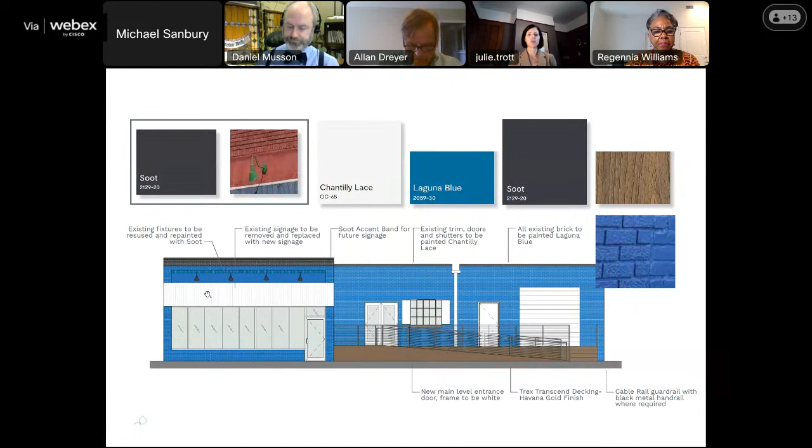Okay, not seeing any, then Mr. Musson, please call roll. Ms. Anderson? Yes. Mr. Dryer? Yes. Dr. Williams? Yes. And Ms. Trott? No. Madam Chair, the motion passes by a vote of 3-1 with one recusal.

So you have been disapproved. Please reach out to staff and they can help you work through some of the logistical items that we have seen and discussed here, along with we recommend you reaching out to Ms. Kovar from Northwest Neighborhoods.